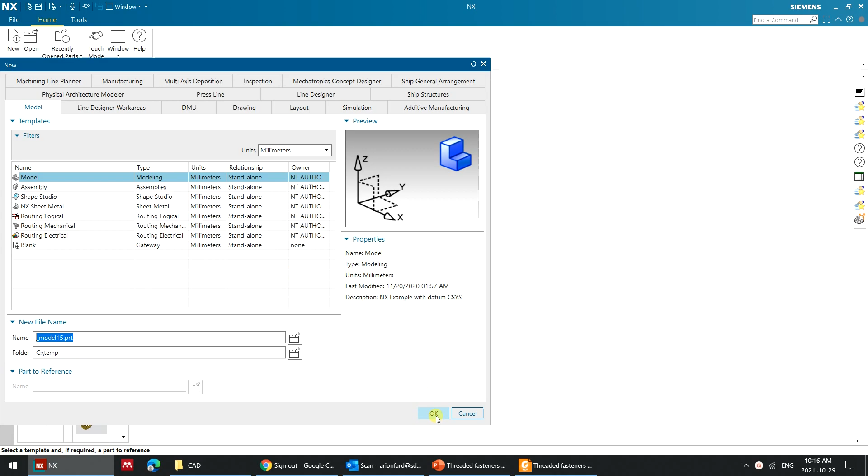So what I want to do is set up a very simple model that first we can verify the theoretical result for a static load and compare it with the simulation result. Again, we are following a static and linear case in simulation as well.

Then we want to see what is the actual easiest part for simulation, because there is a problem with simulating screws, and that's detail. If you want to simulate a screw in detail, like simulating threads, that requires a lot of computation power, so we need to know if it's actually necessary to do that.

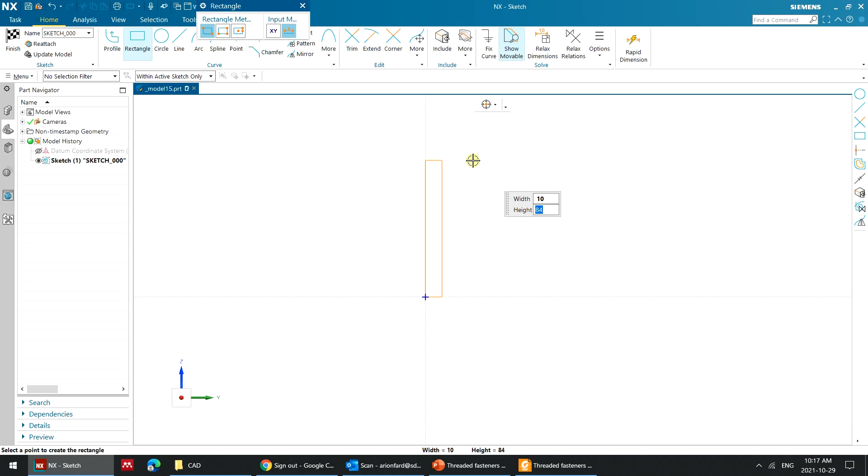Even without the threads, let's say you have an assembly with like 50, 100 screws, and the thing is that the screws are usually a much smaller size compared to the model, and that causes a huge difference in mesh size. So you're going to have a lot of fine meshes for the screws, and that makes your mesh very big and very time consuming to solve.

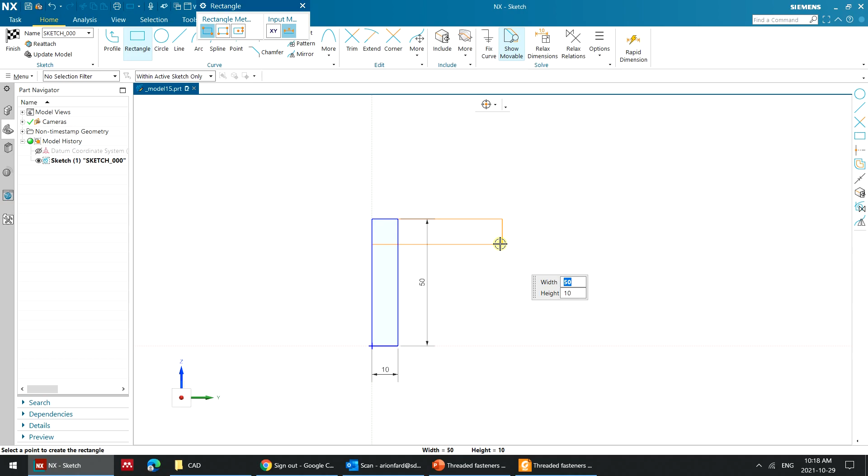So we want to see if there is a more simple way to actually do that.

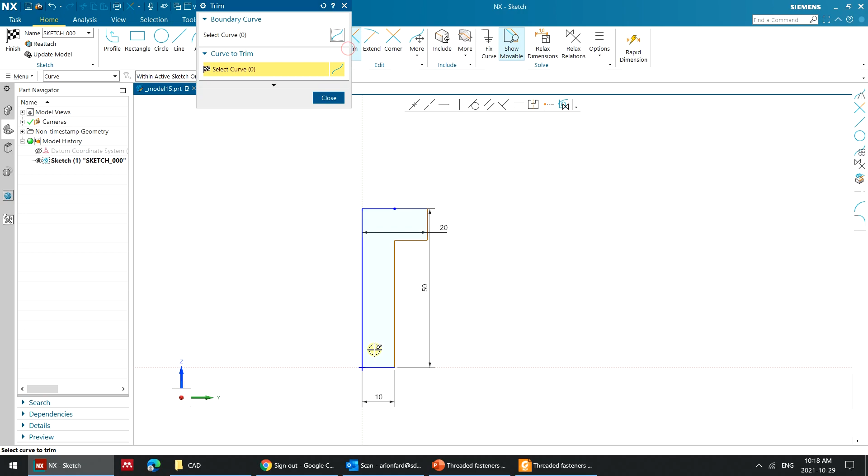Is it around the middle? Is it one? Let's go with a shorter one. I just need this for applying the load and nothing else. For now, I'm just trying to model the plates, then I model the— could you please trim here? Then I model the screw, which we're going to go with the simplest way, which is just a cylinder.

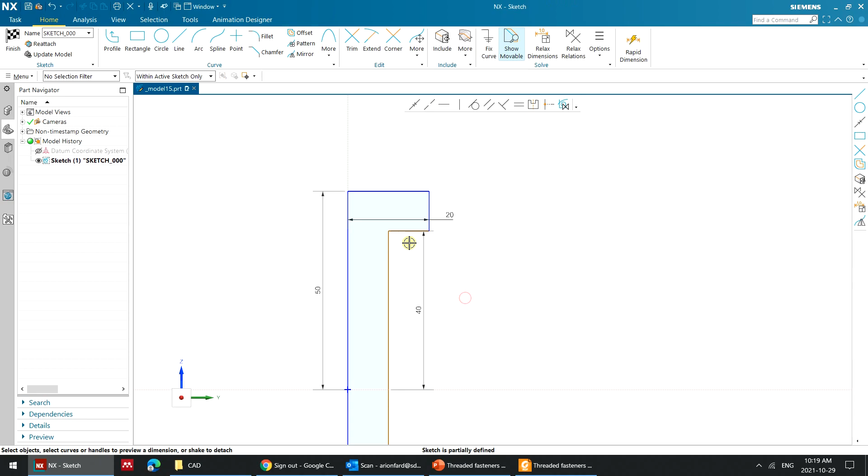I'm gonna... and I'm just gonna extrude this. It's a plate with two edges for applying the load.

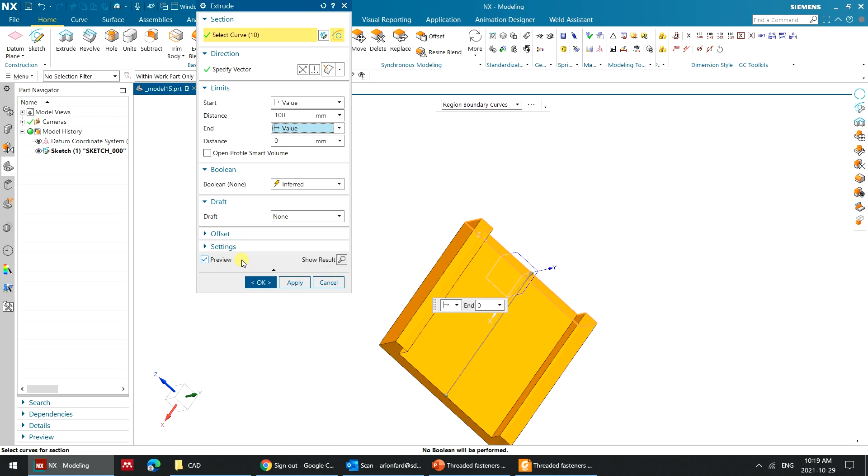Let's go with maybe 50 on this side as well, or maybe 100, just to have a bigger load distribution. Then I put a hole in the center and copy it, and then put a screw in the center.

Let's go with M10 in the center, so it's simple enough that we can confirm it with the theory.

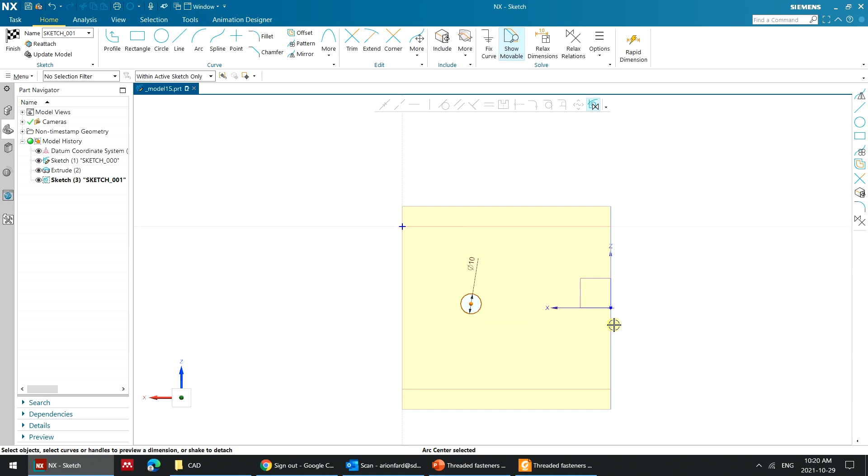But the speed you're modeling depends on the setting of your NX as well. I'm just trying to put it in the center. Yep.

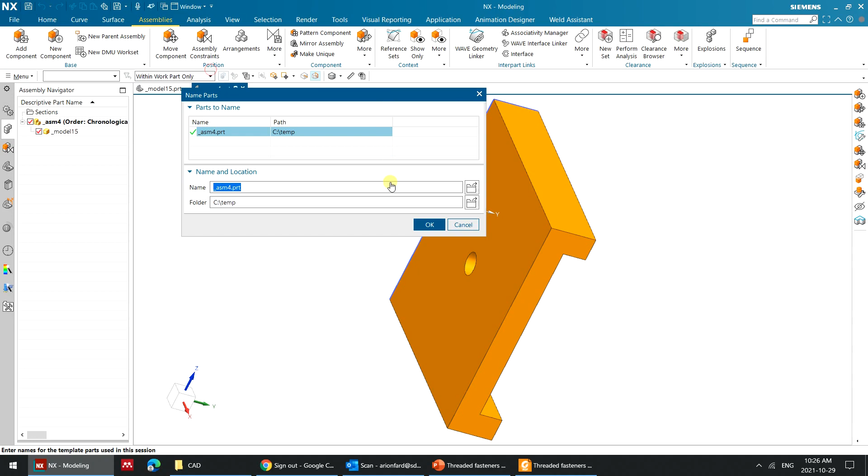So I'm gonna just copy this, but before that I need a new parent assembly to put this under. You just go to the assemblies and click on new parent assembly. It puts an assembly on top of it, and then you can save. It will ask for saving that assembly part. Then it looks like this on the assembly navigator on the left, right?

Now I can copy another part, but just Control C, Control V on the top, or just right click and copy, and then right click on the assembly and paste, right? Then I'm gonna unpack it because I want to move one of them. So at the end it's gonna look like this, right?

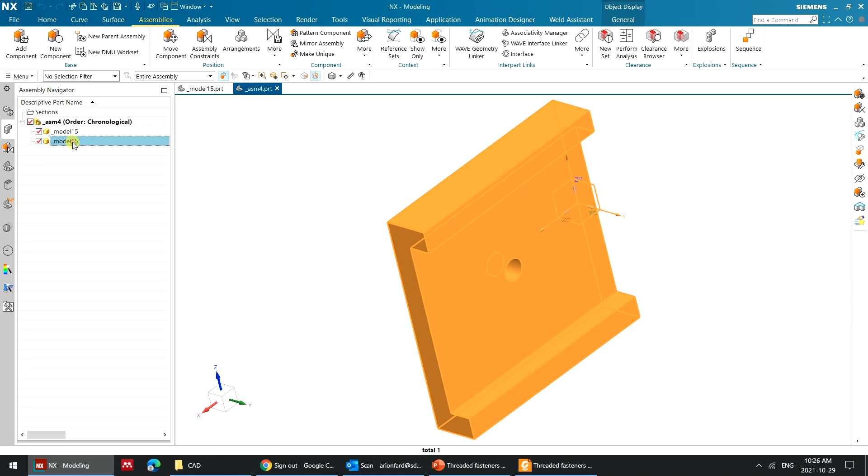And let's move the other one to the other side. So now I have two parts I want to connect with the bolt in the center, and I use a constraint to just put them in the right position for now.

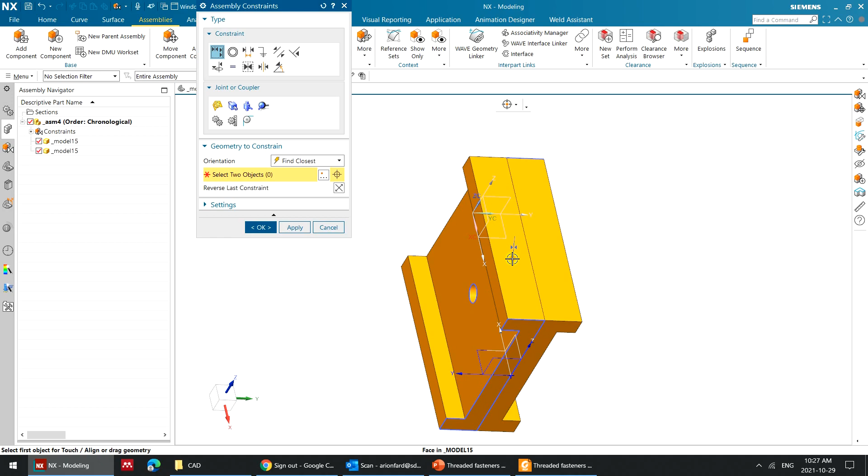Like this, making sure that the holes align, otherwise you're going to get some weird errors. The third part is going to be the screw.

So I'm going with new component, make a new component here, double click on it, and I will start modeling the screw. The hole is 10 millimeters, so I go with M10.

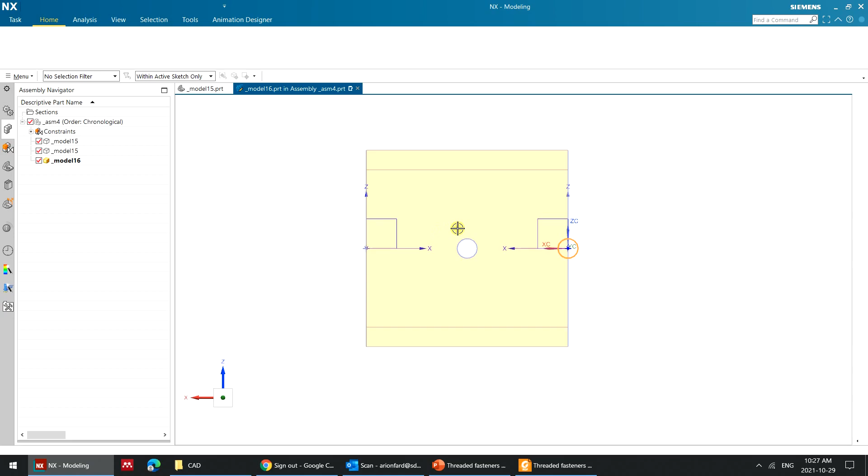Select any plane you want, and just a cylinder, 10 millimeter diameter. And the length I also go with 10.

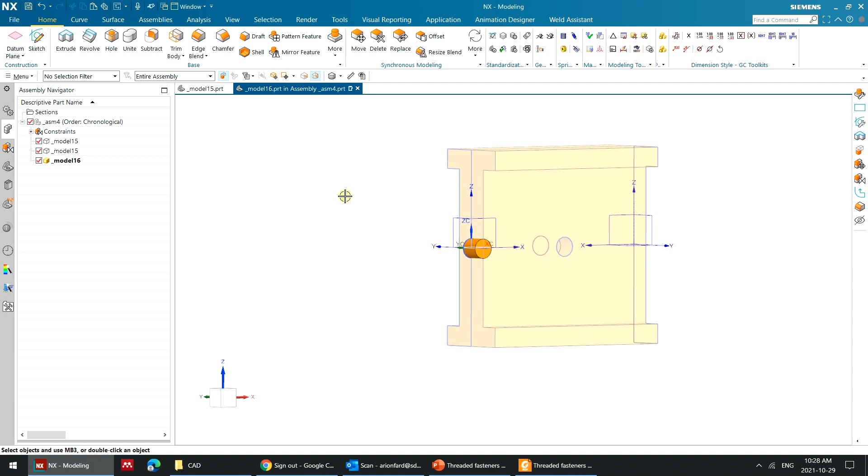Then I mirror because it looks the same. There should be a nut on the other side to hold it, but I'm just going to consider a bolt and nut as one uniform geometry because we don't want to simulate or model threads. They don't give us more information for the modeling.

We are looking for a static load, which is the stress in the center of the shank of the bolt. We are not looking into thread failure now.

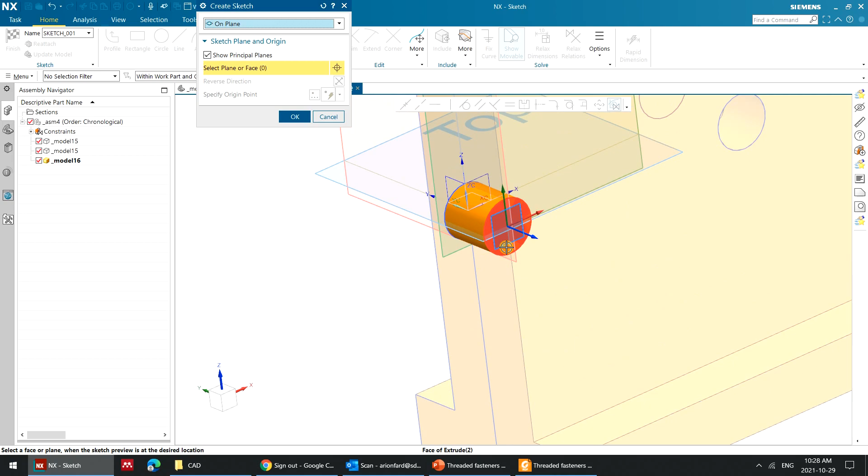So the screw head, I'm going with a hexagon, but we can do any kind of head. For 10, it's 17, but as a diameter. Metric. It could be something else with another system, and it's usually I think 7.

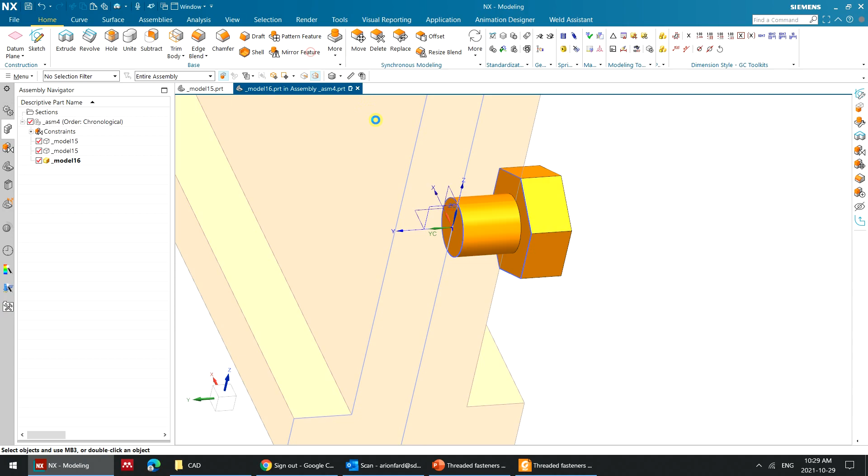So this is the head side, and for the nut side I can just mirror this. Where is the mirror feature? And I want all the features on this plane.

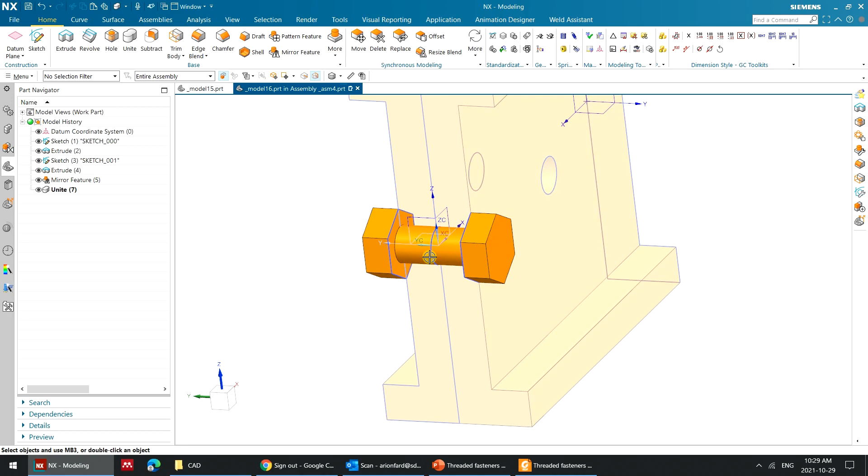Okay, let's see the result. Yeah, it looks fine. So this represents a bolt and nut that is going to hold these two plates together. You just need to make sure you unite them, otherwise I get two separate mesh bodies. I have to connect them together. Now it's just one body part.

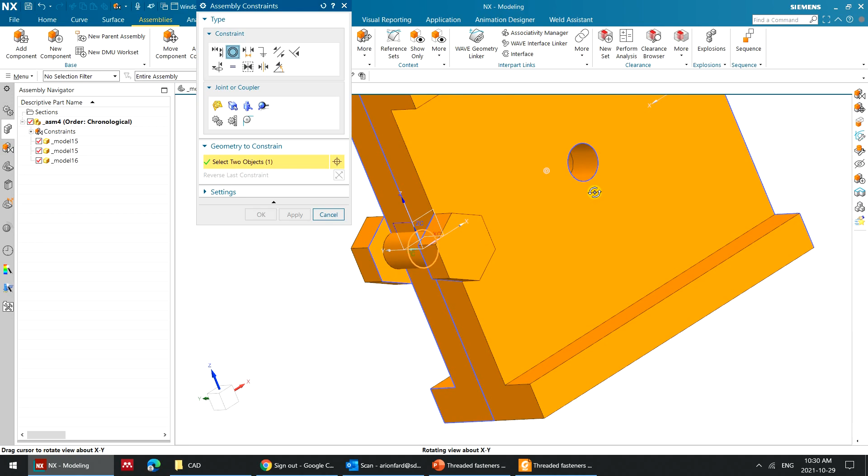I'm gonna save it, and then I'm gonna place it. I go back to assembly, top assembly. I can move this around. The best way is to use a constraint. Concentric constraint - this circle should go here. Which diameter did you use it in? 10. 10, yeah. So this is the model we're gonna simulate.

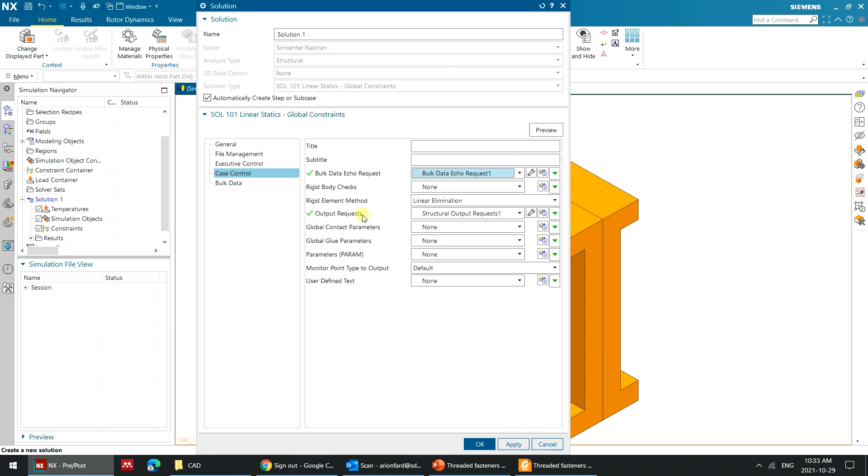So now the model is there, we can go application, pre-post. And I want to have all the parts. We're going with a structural, and as I said, this is going to be a linear simulation, a static load. So here, linear static 101. And create a solution. I probably need to come back here later and request some new outputs, but for now it's okay.

So the best way to run a linear static simulation is to always have some constraint. If you want to have some constraint and some load, how should I do that?

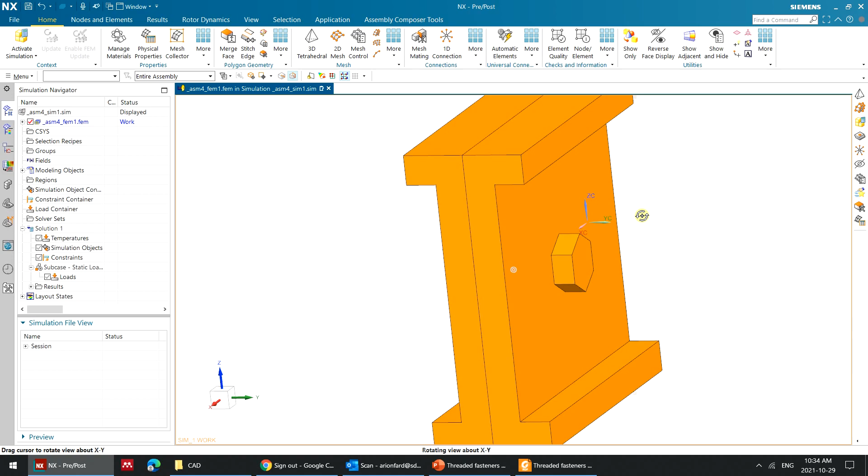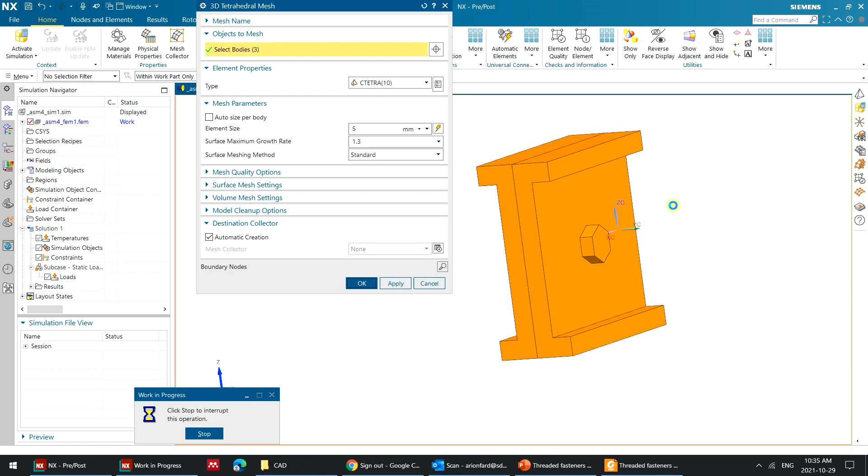So I have the mesh ready, and let's define the material here before I forget. So I want to, let's go with a steel.

Oh yeah, that's possible when you model your part in the modeling app. No, in the - no, I know. Listen, when you model in modeling app, you probably applied some material to it, or NX by default is using a default material in modeling. Okay, then you bring your model to pre-post. It gives you this option as well here.

If I go back to inherit the material here - here, you have this option of inherited. Okay, so inherited like the assigned - get it from the modeling. Oh yeah. But if you don't, then it says, okay, you already assigned the material, you want to override it. That's why it's asking.

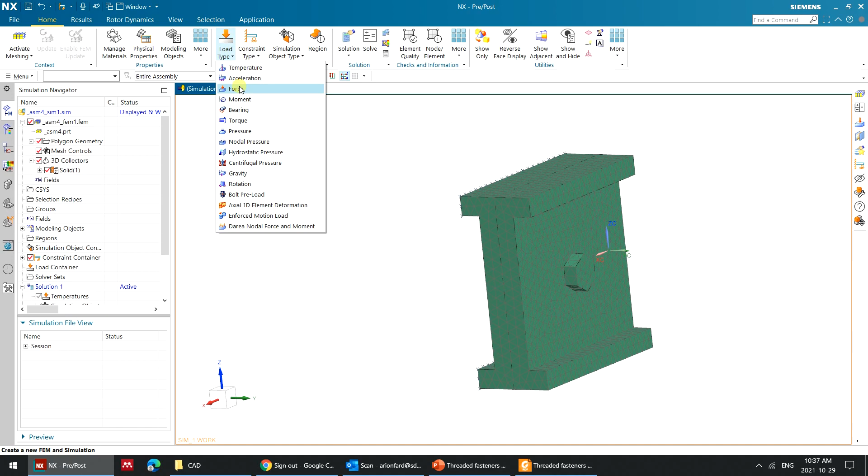Now if I fix this side, how much is the load on the other side? Anyone? 1,000. The 1,000 work on both or 1,000 on each? Let's go back, good question.

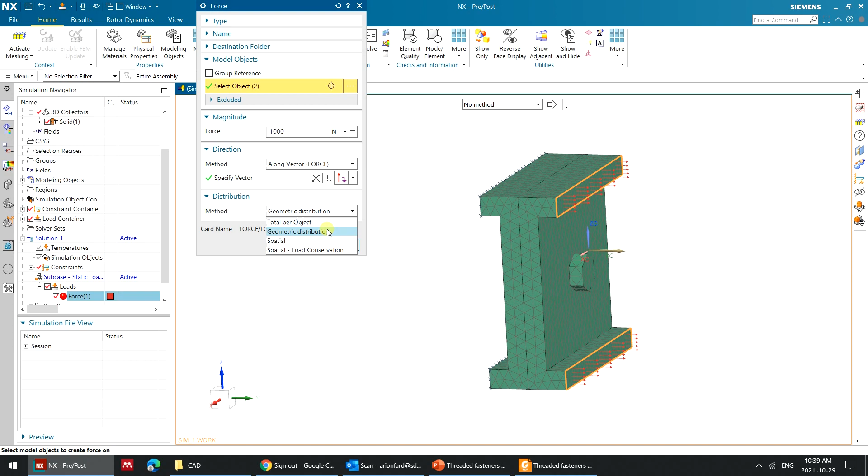When you define the load here, it gives you options. Did you want it total per object? Then it will put 2,000 because I'm selecting two objects. Or geometric distribution means that whatever you selected, I'm going to distribute 1,000 all over it. This is what I want. If I use total per object, it puts 1,000 in the top and 1,000 in the bottom. So go with the geometric distribution.

And contact. So for the contact, I'll go to simulation object type. I really don't need the contact. I need gluing. What is the difference?

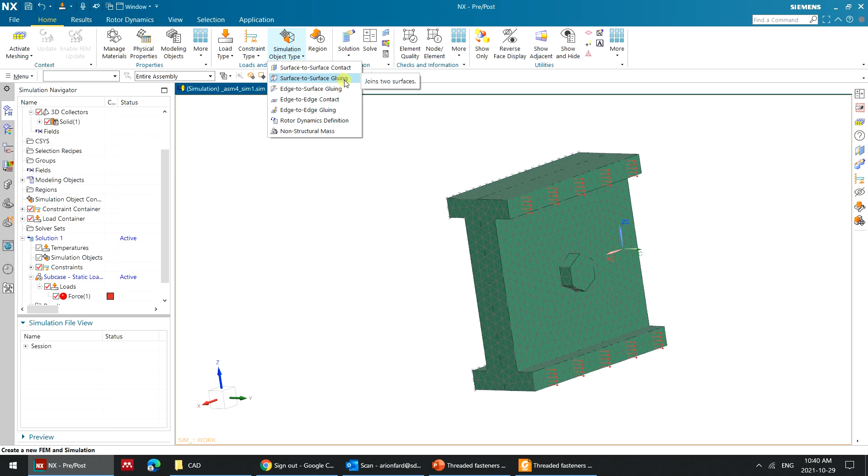For the contact, you define friction. So it is allowed to move, right? Generally, when you fasten a bolt, it's not going to glue there together, but also you don't expect it to move around. So the gluing will do the job without going to the contact loop. It's more simple to use glue. Glue means exactly like contact, but without movement. So it basically, as the name says, it glues it together.

I only want to, if you select all of it, let's see what happens. If you let the software auto-detect all the contact, it comes back with 5 pairs. And I can see the pairs if I just go here.

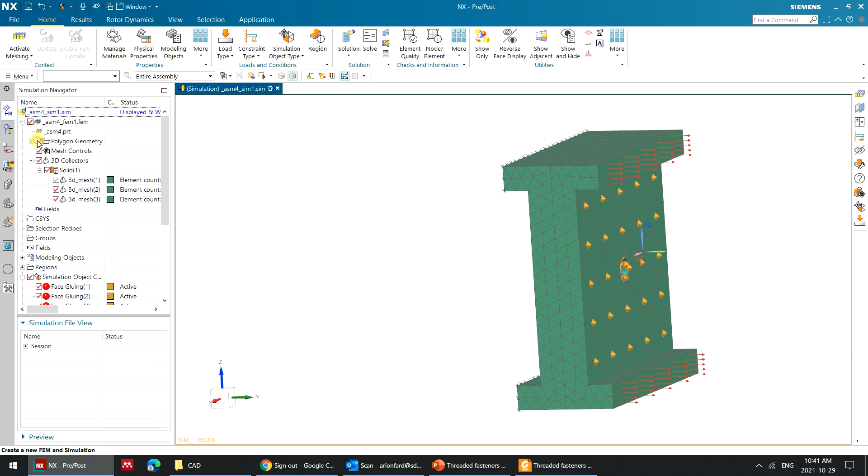So this is 1 pair. It detects the shank contact inside the hole as well, but I don't want that, I don't want to connect it like that. I think it's easier to hide one part and see the contact from inside. So I don't want this contact. Which one is it? From the shank, this one, I can just delete it. And also that one. I think all of the contacts are wrong, and this is the contact between two faces, so we have to define the faces manually.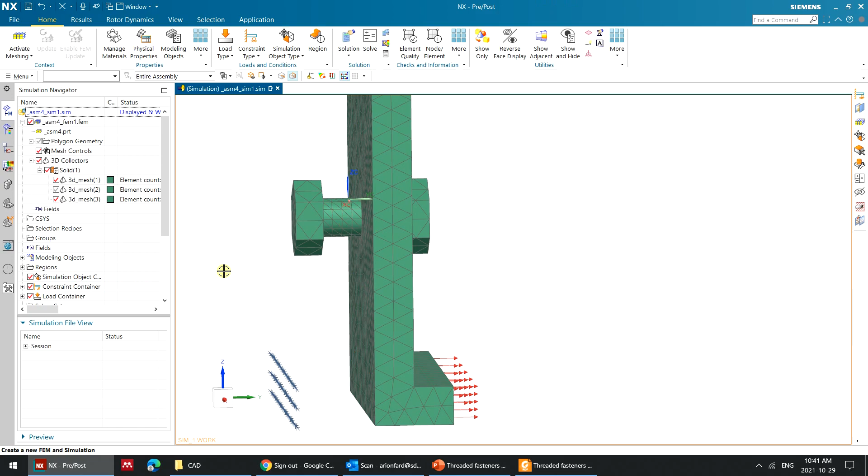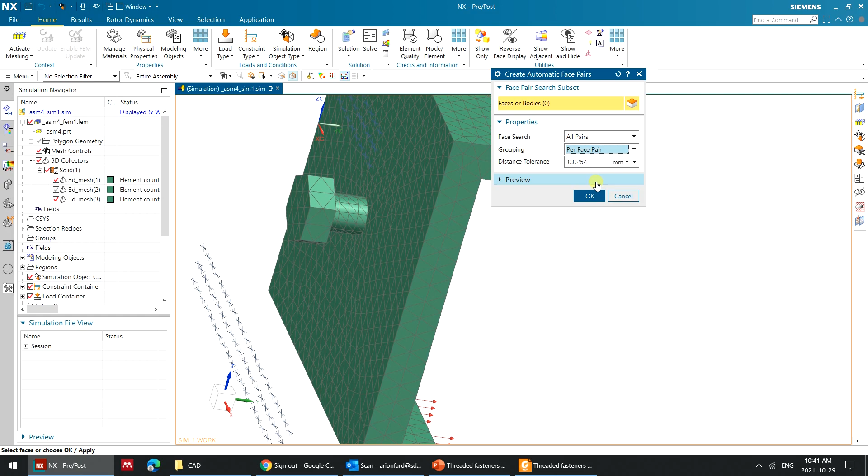So let's select manually. I go back to contact gluing again, selecting pairs. Make sure here you select per face pair, so it's not automatically looping around the body looking for all the faces that are in contact. I want to actually dictate the faces that I want to glue together. Let's hide this, I want to glue this one. I have to bring back the polygons.

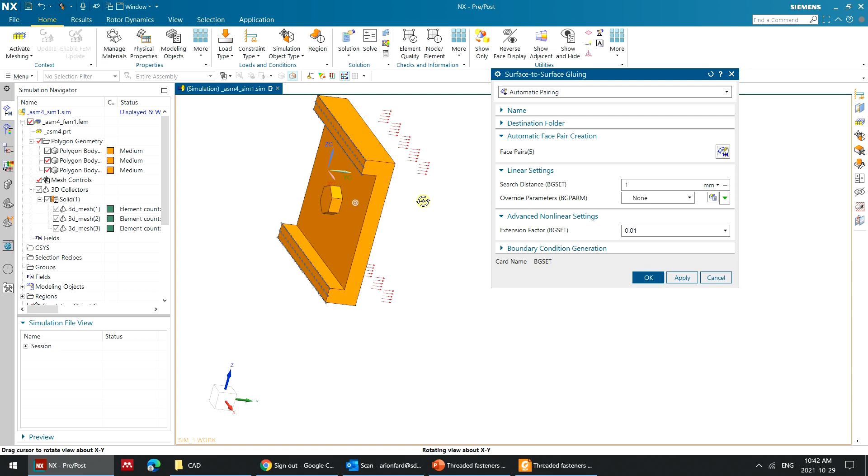Yeah, this face is going to connect to this face, and the other one is this one being connected to, yeah, this face. And this should be okay. No, I have to do it separately, or I have more. Yeah, I can just remove the ones that I don't need. This one is correct, this is not, just delete it, this should be deleted. This one is correct, and this should be deleted.

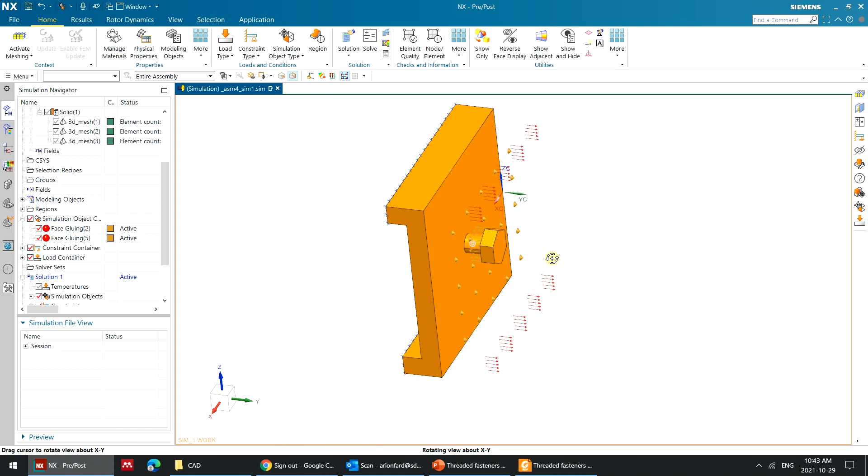Okay, so it should look like this at the end. So washer face contact to the plate on both sides. Let me bring back the, yeah. Okay, let me save here. So I got the contact gluing.

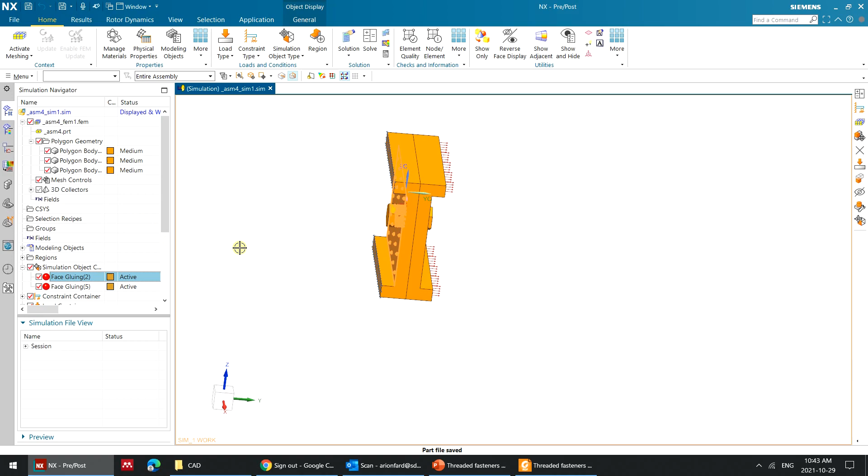Why do you want to do the... it is not actually in contact. It is if you have threads, but as I said here, we don't want to focus on thread engagement or thread failure, that's the next lecture we're going to do. We just want to rely, and that's not always the case. Usually you can have a full shank without thread, so the thread just stands out on the nut side here. That part is threaded, the rest is a shank.

We're doing gluing because we want to see where it fractures or what? Yeah, we want to measure stress inside the bolt. If I run the simulation without contact, what happens is that this part just goes through these, so it doesn't work. I can define a contact, not glue, but a contact, but contact loop is complicated, it considers friction as well. I don't want to consider that, I just want it to be completely like welded. It gives a faster simulation if you use gluing instead of actual contact, if you are sure there is no relative motion.

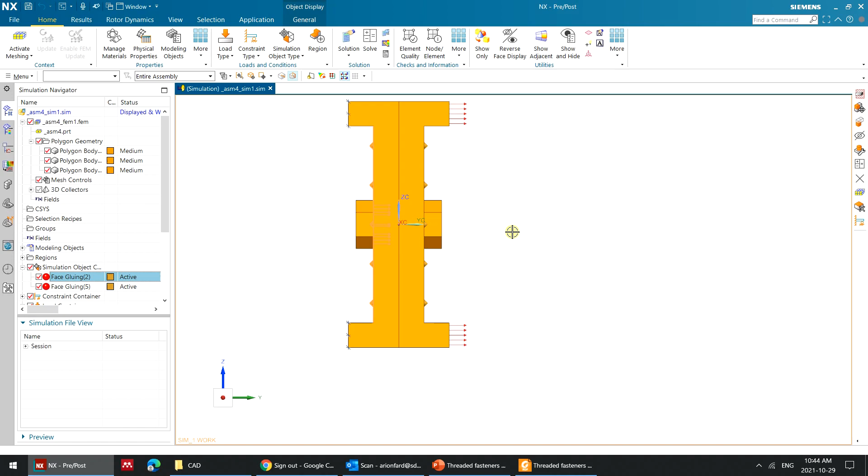What is the benefit of doing this in comparison to an analytical calculation? You're gonna see here, you're gonna get the same result. But if you're looking for a stress concentration, this type of simulation in general has no benefit. This is the wrong way of running a simulation on a bolt, as I said, because I'm wasting a lot of computation power to mesh very small bolts, which I'll only care about the axial stress.

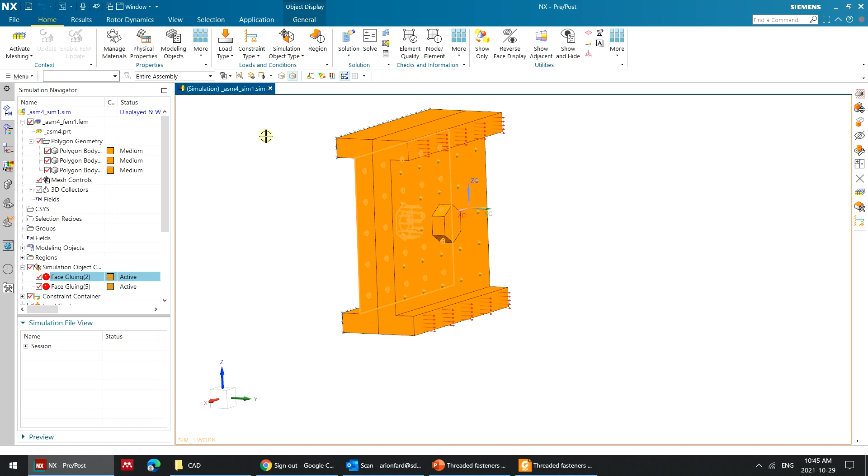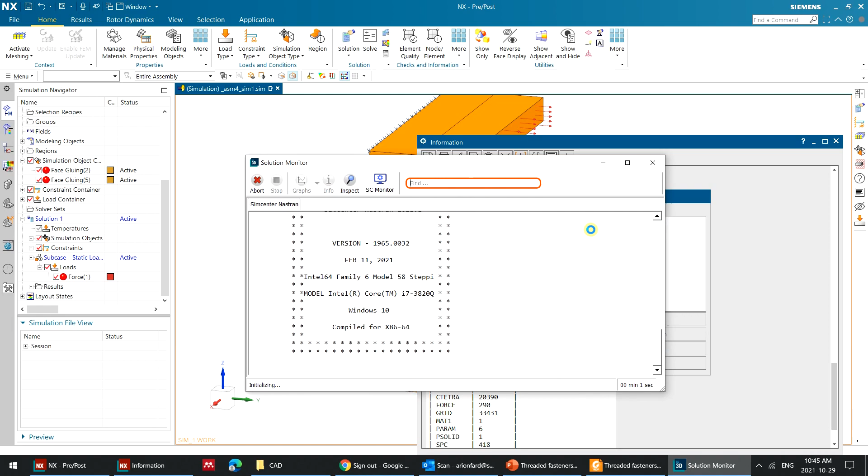Why are you not just using symmetry in this problem? Yeah, you can, actually you should. I'm trying to keep everything else simple, it's easier because my focus is on simulating bolts, so there's absolutely no need to even have the plates. Unless you actually want to read the stress on the parts as well, so you solve everything at the same time, right?

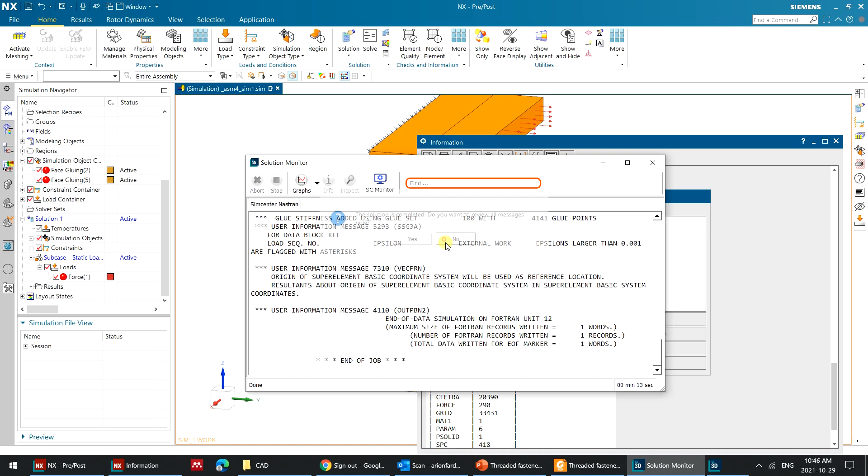But don't you also have bolts that are already preloaded? Yeah, that's another thing that is not possible with this kind of simulation, but I'm going to show you the right way of doing it, which allows you to add preload as well. But that's a bolt inside of NX, right? That's in NX, you're gonna, if you wait like 5 minutes, I'm gonna do it.

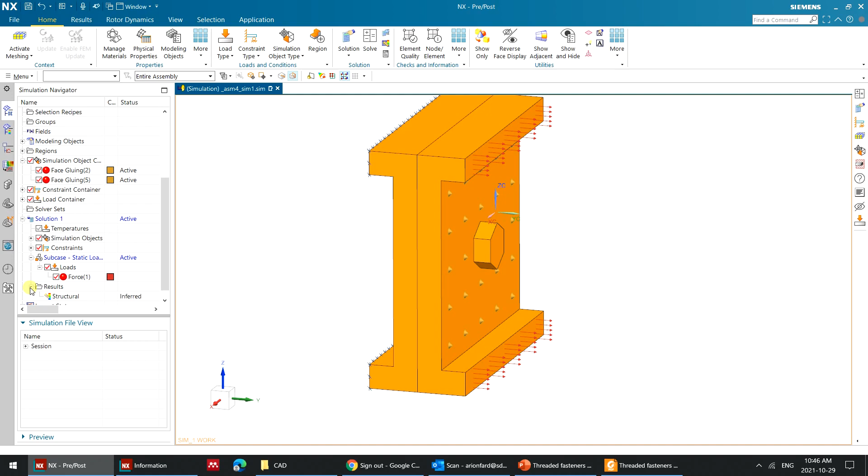I haven't checked it. Okay. If you have, I will be very impressed.

What is the difference between elemental and elemental nodal? It averages on the node and element.

No results. What? Sorry, calm down, it's NX. Yeah bro, it's just, it always gives you errors.

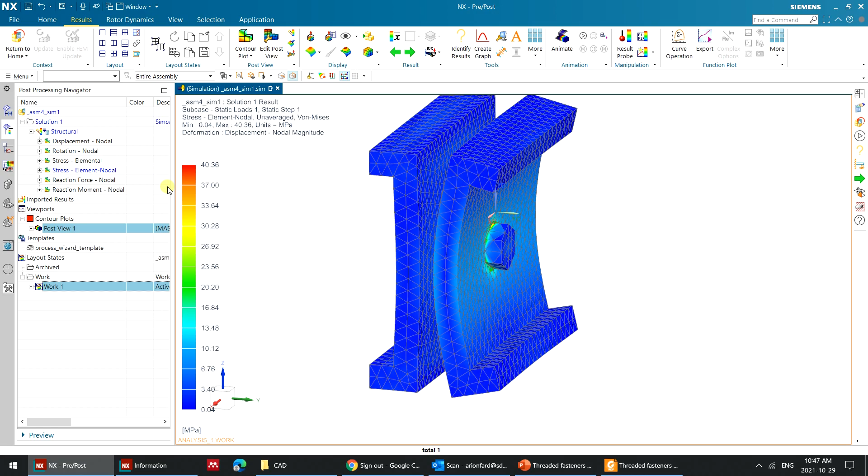Of course it fails. Elemental averages over elements only, while element nodal considers the node, and also gives you the option to select the node when you go to identify result. You see, I can actually select the element, but I can also select the nodes as well to read the stress.

So I have the simulation, it looks like this, and to just focus on the bolt, you can go here to post view and hide the meshes that you don't want.

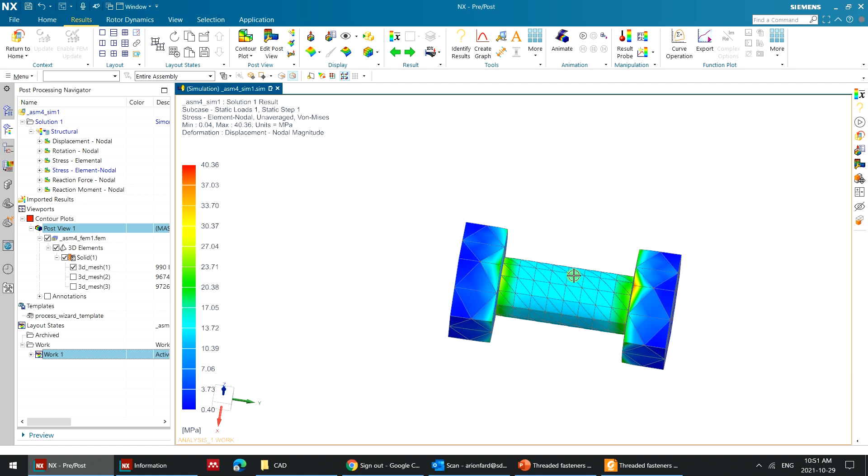So you see the stress on the maximum, if I want to check it, is around 40, which we already know is because of stress concentration and singularities on sharp corners. What I care about and what I want to compare with the theory is the average stress in the shank. And I can just go with identify result.

I want to pick a box selection of all the elements, maybe around here, and average that. That's the same result, of course.

Simulation sigma is 12.72. What was it? Forget about it, 12.73. I had the same problem.

Okay, there was a problem... We failed with the 72. This is good enough, which shows if your case is a static case, in theory it actually matches very good with simulation.

If you are looking for a static linear case and the stress distribution is good enough that you don't have a stress concentration, you can easily compare it to the theory.

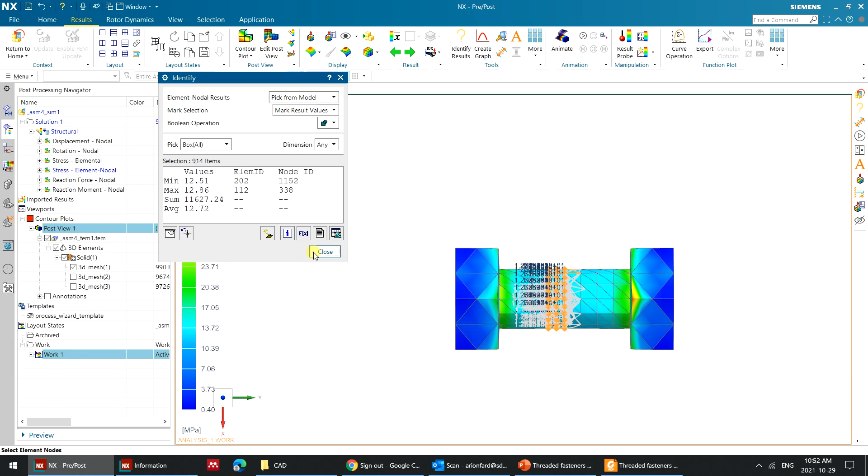But there's a lot of elements just for this one screw. And imagine there is a sealing problem, you have 50 screws all over the part, and then you mesh it, solve it. You're gonna have a headache averaging them and finding the cross-sectional stress and all that.

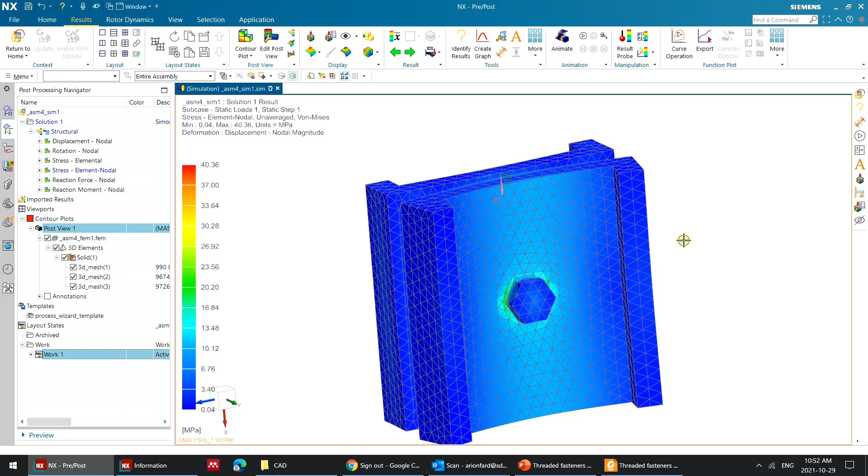So NX actually has a bolt simulation thing, and you thought NX sucks, but not that much. There are useful things you can do with NX.

If you go here, under Connections, you'll see we tried mesh mating, we tried 1D connection. Now you get a bolt connection, which is just a 1D connection with extra steps. So it will do a nice 1D connection, representing a bolt with a 1D connection, the way I'm going to show it.

But before that, I have to get rid of that actual bolt there and replace it with a simplified version that NX is offering. To do that, I probably need to redefine this.

Let me see, how can I edit the FEM file? Let's go here, edit bodies to use from all visible. I want to go to select, and here I...

Why do we have to take like a million things just to do like... no, maybe I'm doing it. I mean, there are thousands of ways to remove that screw.

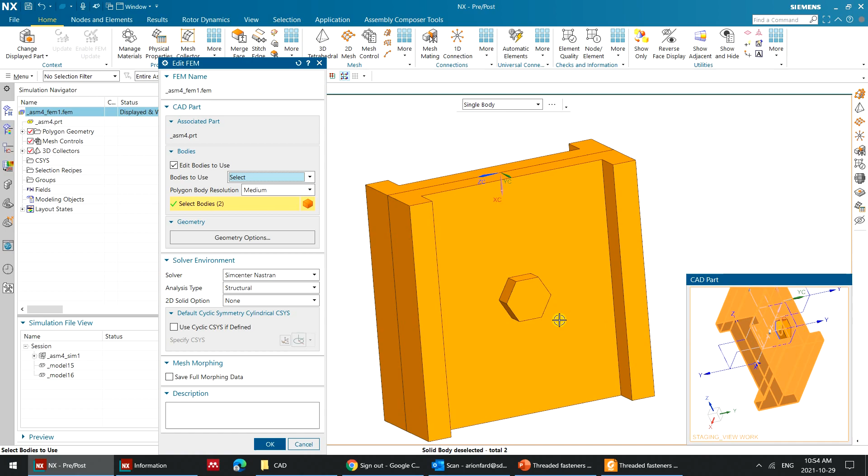You could just remove the polygon and update it. This is all I used to do, so I don't... The same with modeling, I did a quarter of the model, mirrored it, but you could do it a different way, maybe more simple. I don't know, it's just a habit that you just need to get rid of.

You could also remove the mesh as well, but it stays there in your monitor, then you have to hide it.

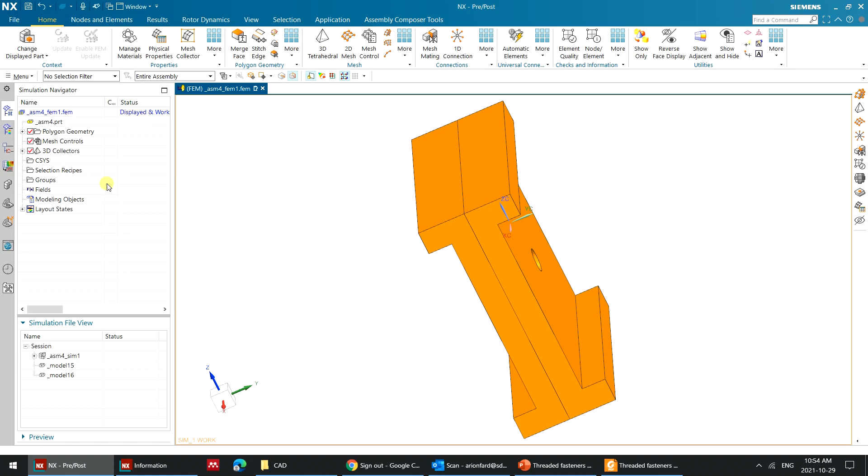But yeah, let's continue. So I have it now. I can go back, double click here, go back to the simulation, and you see the face gluing.

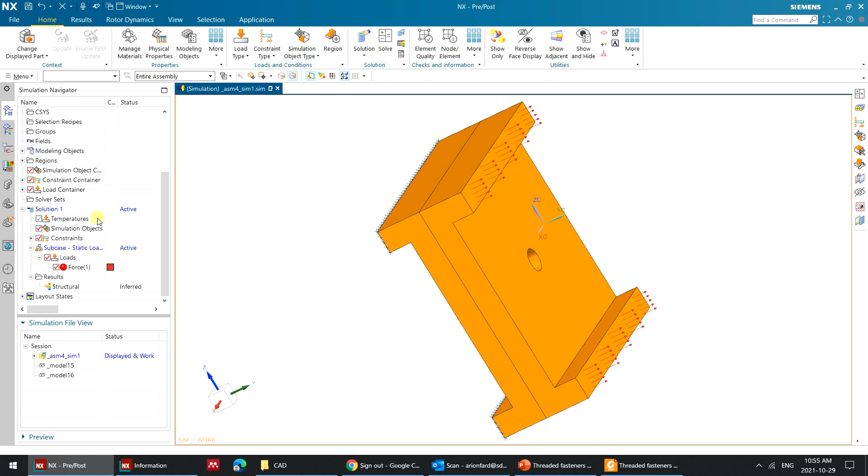It's not wrong because I actually don't need it. There is no washer face, there is no screw. Let's get rid of that. Force is okay, and constraint is okay.

Now let's try this. I have to go to meshing, so I activate meshing. More, where is it? Here, bolt connection.

So on the top, you have different options. You can do a bolt with a nut.

Let's see it first, then I show you. I'll put a bolt in a tapped hole as well to see how it looks. We're not going to use a spider at the junction - that's for something else, you can simulate a rivet with that. Let's stay with bolts with a nut. That's what we have here.

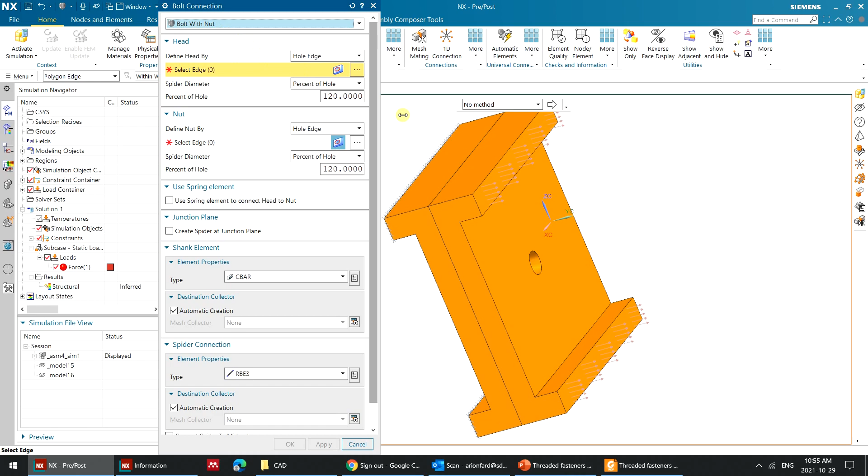The first one is the head, the second one is nut. The head is asking for a hole edge, so let's assume this is the hole edge. After I apply, you'll see what happens. Then I'll explain this percent of hole.

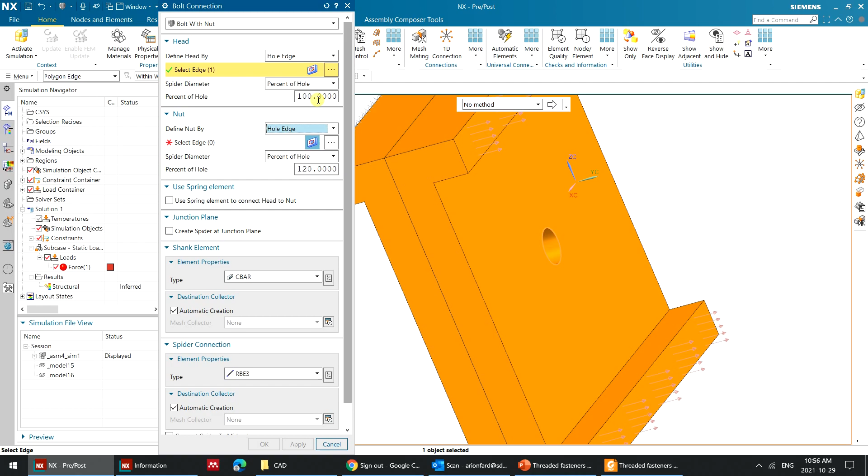Let's go with 100% now, so everything is the way I select. The second one is nut, and is this side - again, let's stay with 100. Then I'm gonna change it back, but let's see how it looks like first with 100.

What is that? How many? Why do you have so many? Why do you need to show that? Okay, decimal points - maybe I have to change the defaults.

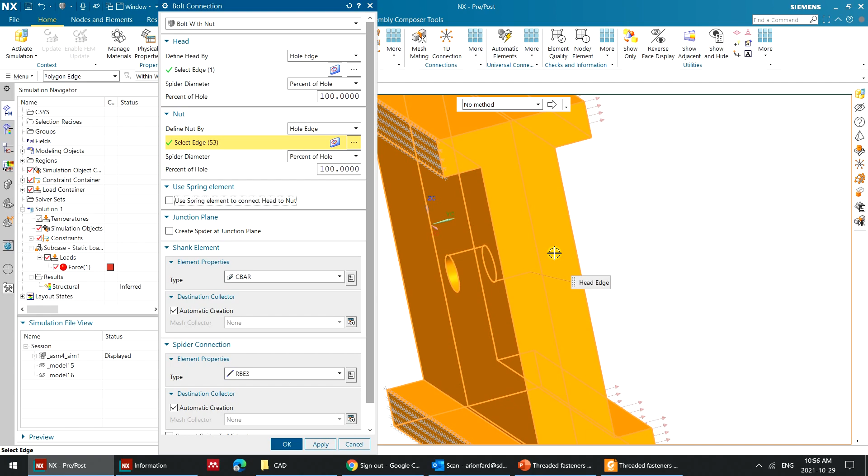I think it was a double variable, but the programmer didn't want to. Anyway, so here the way it works is that NX is just putting a 1D connection, which is a line.

Instead of the shank of the bolt, it's just a line, but it has cross-section properties implemented with a CBAR in NX, or CROD. If you're sure it's circular, you can go with CROD, which I will use in this one. But technically, you can have any cross-section for the bolt. So I can select a C-beam, which gives a cross-section of a beam, a square shape.

You can assign any cross-section to 1D connections without actually meshing it. So it's going to behave like a beam, for example, if I select that, but I don't need to mesh a beam - that saves a lot of computation time. So let's go with a CROD, and that's the element properties.

And I want it to be RBE3, and the next thing is the actual head. How does it represent the head? Let me click apply just to - why do I have a different... oh sorry, here I selected the wrong side for the nut.

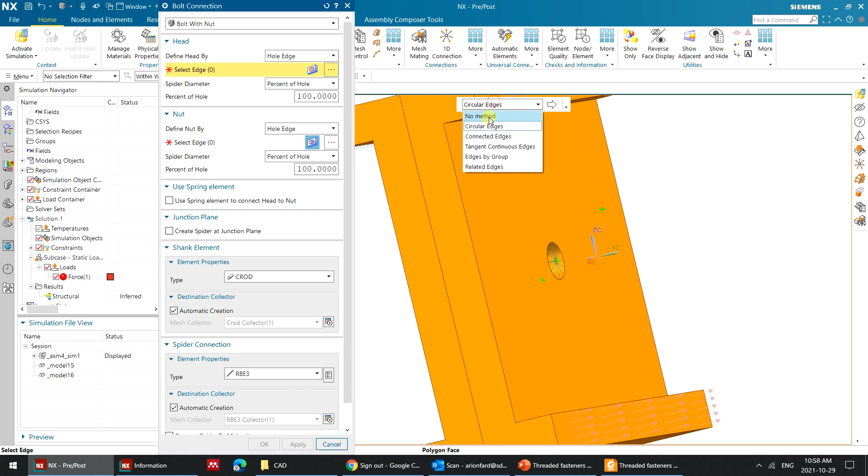Let's go with the circular edge here. Come on. On this side, I think we missed one - yeah, there should be one. It was 53, I don't know why.

Okay, now it's correct. Now you see how it actually represents a bolt. I will come back here and edit it again, but I think I made two - I have to get rid of the wrong one. Let's remove it. Yeah, okay, now we are good.

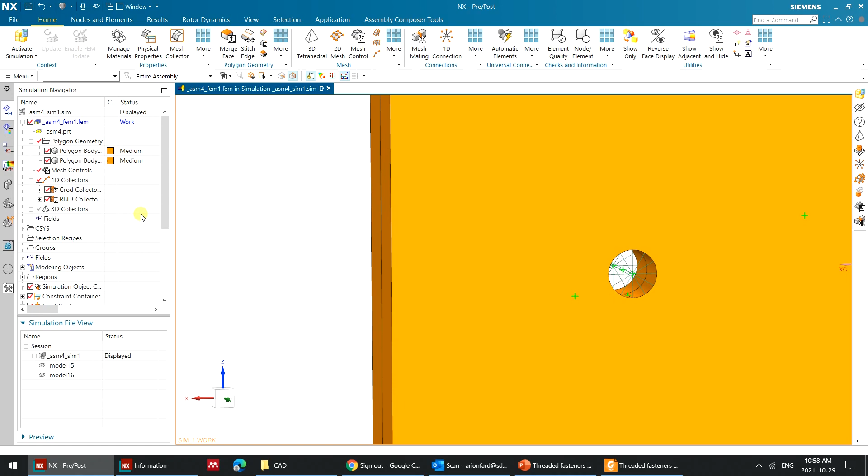So a bolt is now represented like this: there is a spider element representing the head, and there is a 1D element representing the shaft. The axial element, the spider element, is a rigid body element, so this one is rigidly connected, but with RBE3, which is a more flexible rigid element, so it won't make this hole rigid. Otherwise, you won't see any deformation on the side, which we don't care about - we only care about the axial load on the shank of the bolt for now.

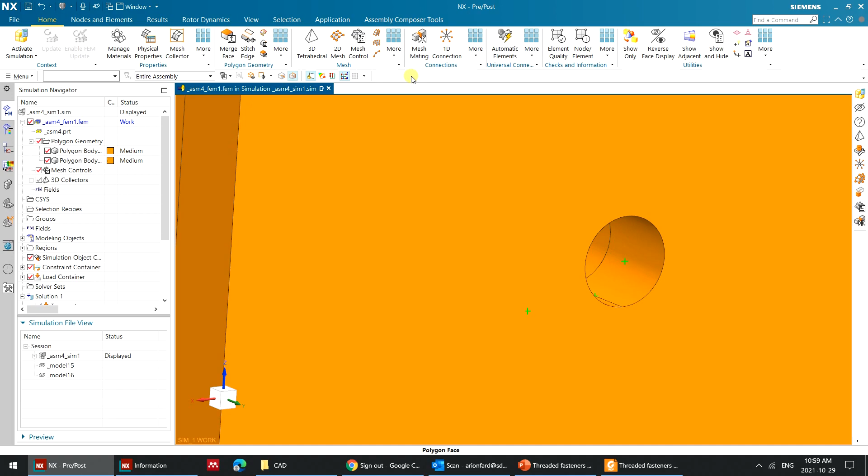But let's go back and let me remove this and make it again. Or maybe it's easier to just remove it and do a new one to see the different ways of doing it.

So let's select again - this is the head. Come on, this is the nut. Now let's say in reality you have a washer face - a bolt is not going to sit right on this edge, right? It's going to sit on an area a little bit bigger than the hole, which is the washer head. You can specify that as a diameter here if you have it. I think for M10 it's around 15.

Or you can write a percentage, like if I write 120 the way I had on both sides - you better go with a diameter, but I don't have it for M10. And if I click OK, now I think I need to, yeah.

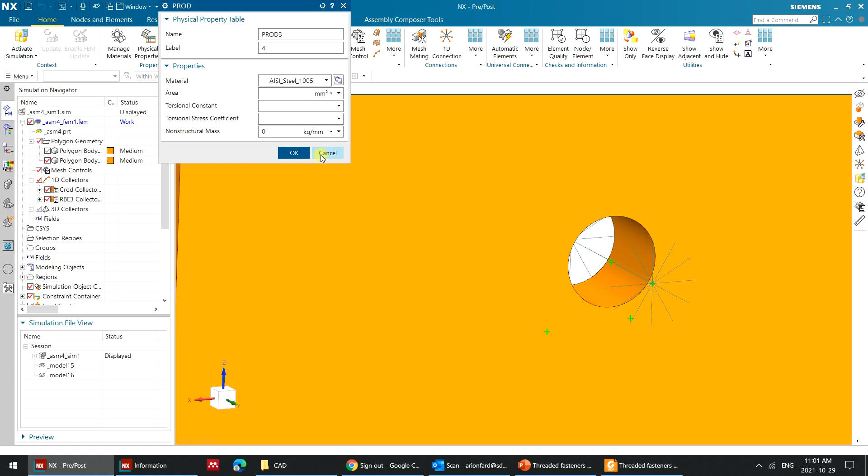When you change 100 to what in this percent of hole? 120. How can you delete it? Because it can't be deleted. Yeah, I can't delete it either, but I just... okay, put it in a new one. Let me do it again. You just click on both, right click, you have delete. Yeah, you don't have that. Yeah, right click on 1D. Okay, you don't have that option.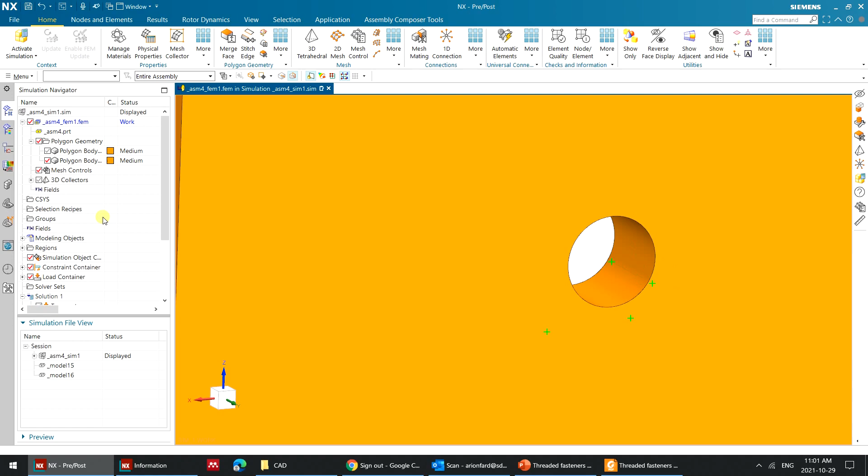It's insane, I have changed this plate part. I will do it again. The bolt connection, you wanted what? You select both of the edges. Select this edge. Yeah.

I have to. I did it wrong. Actually, let me deselect.

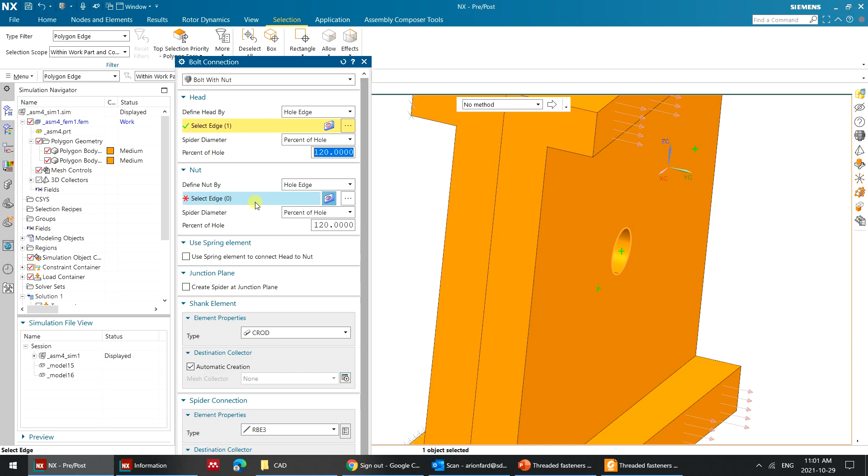So this is the plate, this is the head edge, and then you go for the nut and select this one.

You can go with a rod if you have the area of the nut or area of the shank, or you can go with a bar if you want to actually define it. I don't have the area, so I go with the bar.

Let's see if it's easier. It gives me more options to define. And the rest of them, as I said, the spider element is the washer head. You want C bar, right? Yeah, we can change that later if we want.

And what else here? For now there is nothing else I want to change. So it should look like this.

And then I go under 1D connection, double click on the bar. Now I want to define specifications for that central or axial element. Click here, you can select material here, which is steel. Then you need to define the section.

And click here, add a new section. Now you have options. I'll go back. Okay, let me go back. Are you here? No, where are you? Okay, let's go back, like double click on the bar collector.

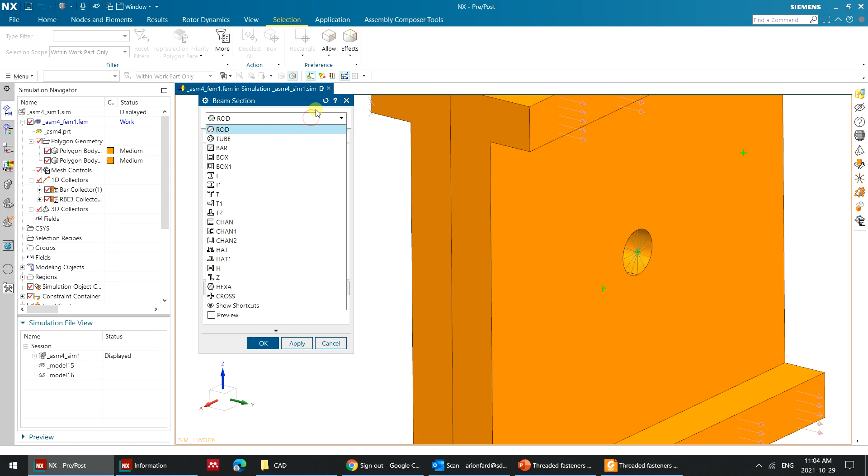Are we good? Then create section. Okay, the cross section of a screw is a rod, but you could define it as bar, box, whatever. I go with a rod, and it is asking for radius, which is 5.

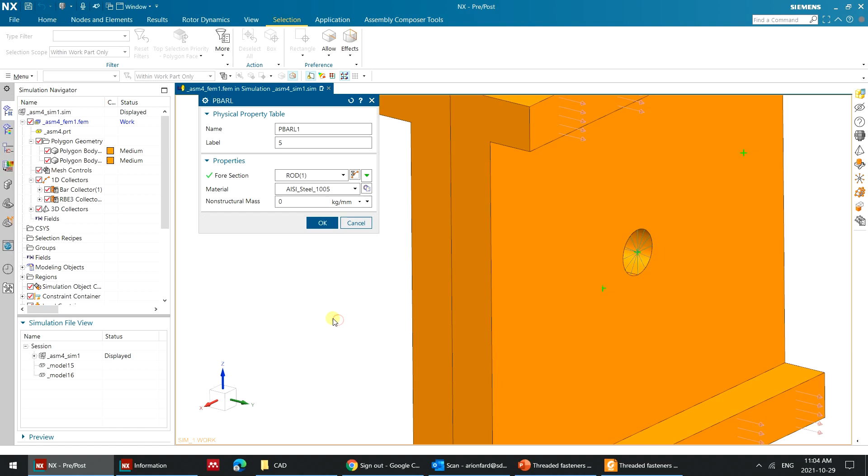No, sorry. Yeah. And click OK, close, and OK, and OK. Just click OK everywhere and close it.

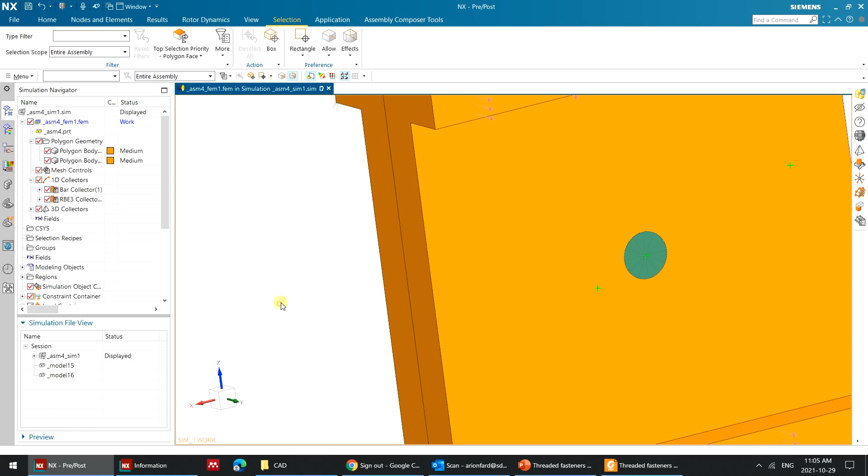Now it's still not very good visible if we did it correctly, so you can actually right click on the bar collector, go to edit display, and it gives you this option of display section. You can select if you want NX to actually apply the cross section all over that element, and if you do this you actually see it as a solid like this.

Just tell me where you're stuck. Maybe I can.

Right click, edit display, display section, change it to solid. What? On the collector. What? Okay.

And then I can see if the screw is actually or the bolt is actually correct. This is just extruding only on the display, only on the view. In reality, it's just a 1D section with the properties of a shank or circular cross section. But NX can show you how it behaves actually.

So I don't need to mesh it anymore because I'm representing the shank of the screw just by a 1D element with this kind of cross section. And let's go back and run the simulation and see if it works.

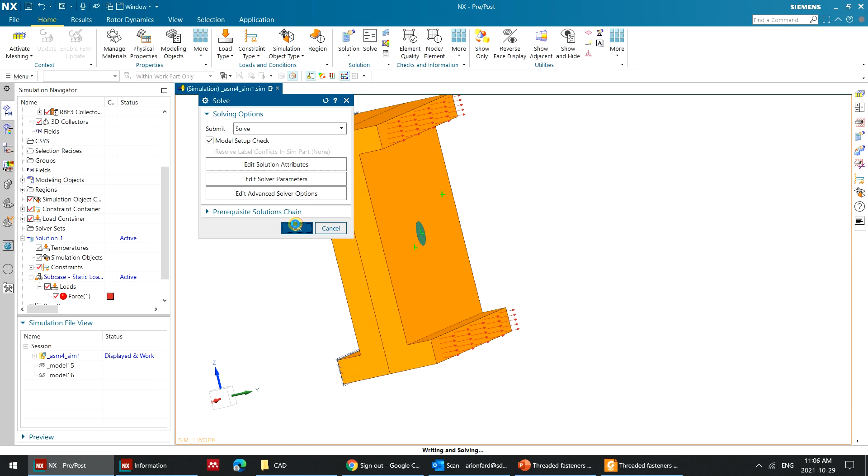I activate simulation. Let me check it again before I move the constraints. Okay, should be fine. Or we get an error and it's a new thing to learn about NX.

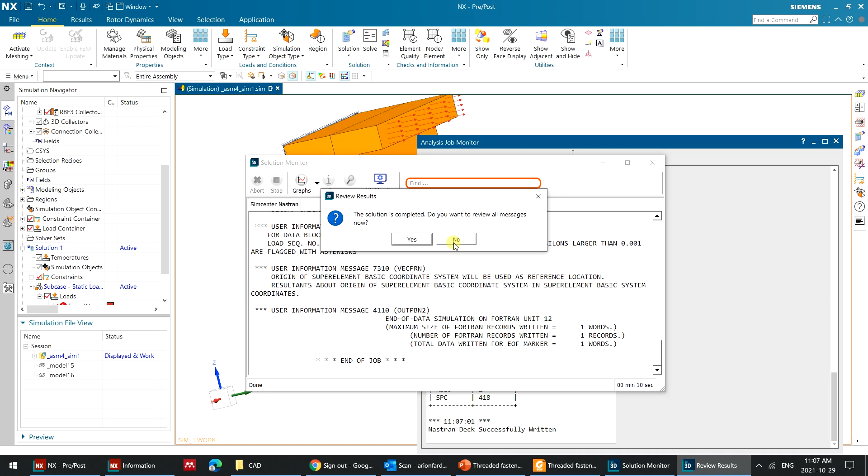For this one, it probably takes same amount of time. We only have one screw, and meshing it or representing it with 1D element doesn't change the time consumption that much. But if you have 50 or 100 screws, it changes a lot if you represent it by 1D elements or by hundreds of elements.

Okay, let's go to the result.

Yours is probably different, so let's go back to simulation. Right click on the solution. We have to ask for information on bolts, because we did a bolt connection without asking for the report, and NX doesn't know. So click on edit, go to the case control, output request.

Click on the wrench. On the bolt result, you have to enable or request bolt result. What was the preload option that says I do? I'm going to apply preload later because we don't have it in theory yet, and I don't want to mix it with this, I want to compare it to this one. It gives me an error because it says we need a preload to be applied.

When you click... something's load, okay, you should probably remove the load applied on your system somewhere. Yeah, do it again, constraints. I don't know why it's removed. But okay, here you need to request the bolt result, so it appears on the result when you run the simulation.

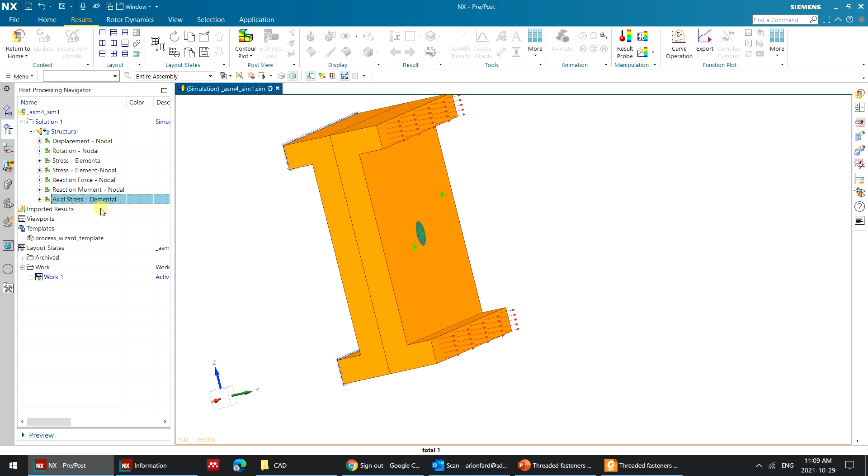If you do, and you run the simulation, go back to the structural, you have one extra result here, which is axial stress elemental. If you double click on it, it only brings out the axial on the 1D elements. I don't even need to probe it. On the left you see it's 1273, which is similar to what we did with meshing, but with only one element, which is super fast compared to meshing the whole thing. At the same time you can see the stress on your part as well.

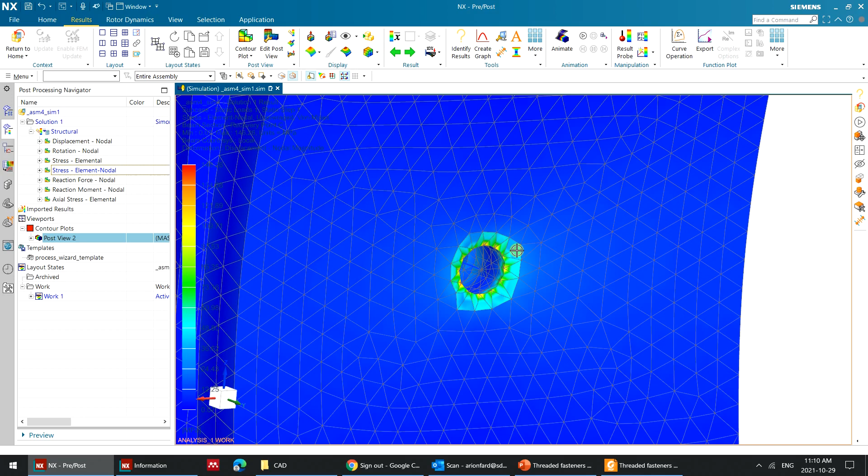So if you click on element nodal, you see the stress on the part, and the washer face is also represented here because we specified 120%, so it extends that spider element 20% more to represent the washer face. So you actually have a perfectly good result comparing to the theory, but without meshing the whole screw or the whole details of it.

How did you? There was another type. There are more types, but another important one is having a screw on one part but threaded into the other plate. How do you represent that? That one is also very simple.

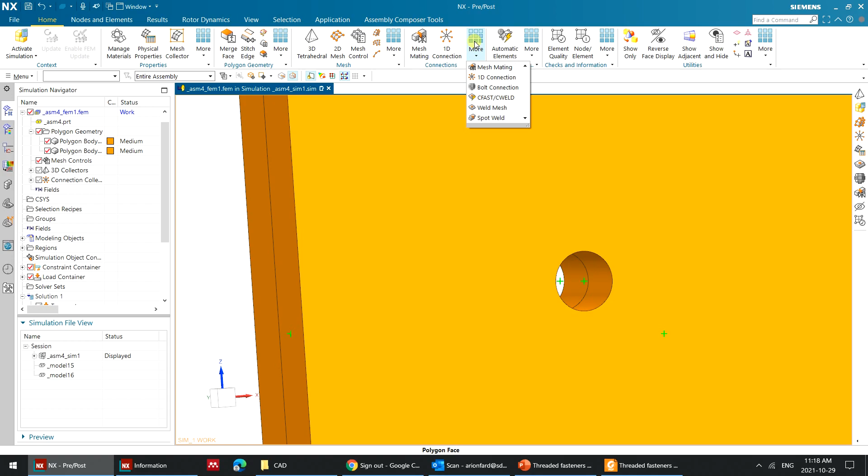Let me remove that, I'll go back to meshing. I remove it because it's easier to see, otherwise it overlaps. So I go to the bolt connection and switch to bolt in tapped hole.

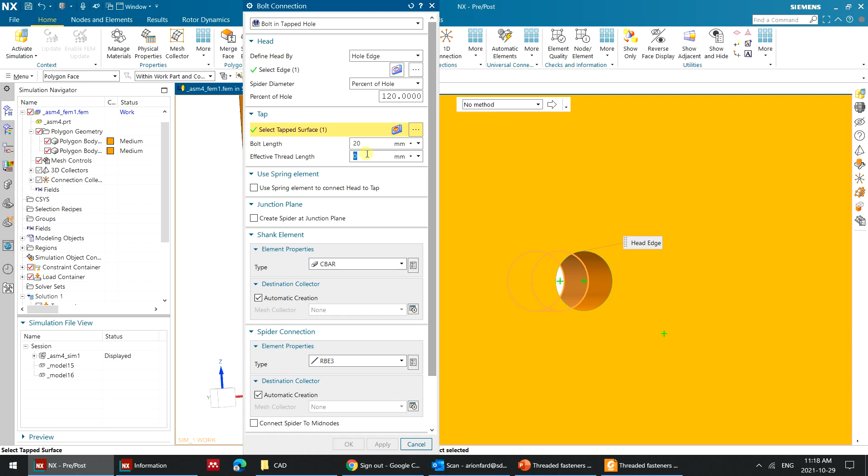Same thing: you select the head, and then instead of an edge, you select the tapped surface, which is that one. It will ask you what the bolt length is. I say 20. Effective thread length is 10, because one plate is threaded and it's 10 millimeters, the other plate is not threaded and it's also 10.

So that's the total length. I selected both of those first, and it threads everything, it threads all the way. It's not a good way to connect two plates like that, one should be without threads, one should be loose while the other one should be threaded.

I can actually change the stuff here, but I don't, I just want to show you how it looks. Now I don't know if it's good enough to see, but I can just remove the plates one by one to see what's going on.

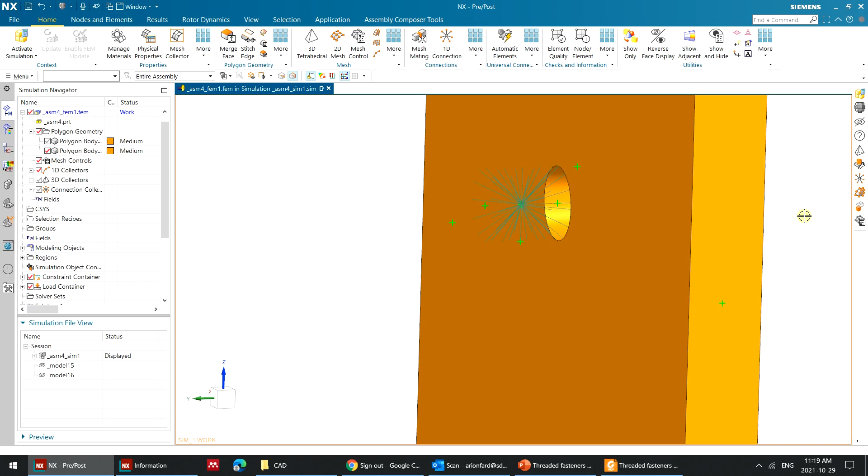Now on the other side, you see we have a 3D spider that just grabs to everywhere. This means the screw actually connects to everywhere on the threaded side, which is the way it actually works, right? When it threads, it connects everywhere. But on the not threaded side, it looks like this, so this is a screw represented only by one needle, and it gives the exact result as if you mesh everything.

Wouldn't the effective area of the bolt be smaller in the place with the threads? Yeah, that's why there's a fore section when you define the section. You can add, I don't remember, a rear section or something like that, so it tapers in between, or you can define different cross sections at different places. But the best and safest way is to go all the way with one section, which is the core or minimum diameter, that's the safest option.

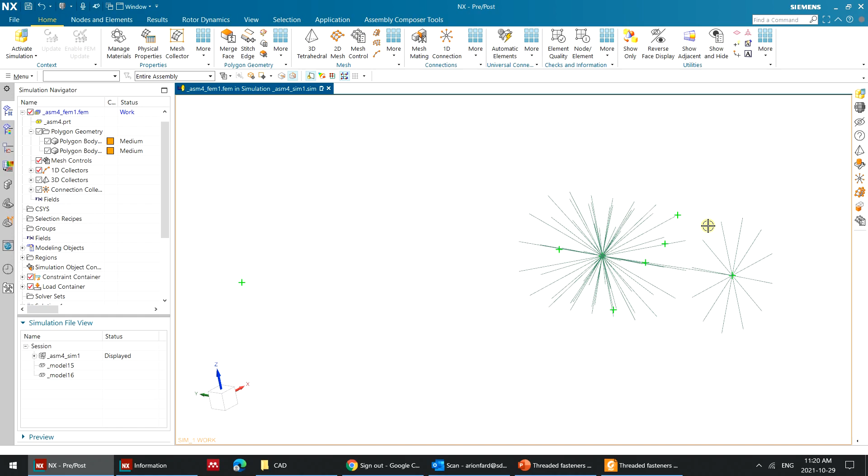We're going to do it like that instead of representing it differently, because if the shank is bigger and the thread is smaller, it's going to fail around the thread, right? You just represent everything by minor diameter and you're going to see the failure. So that's it for today, and next time we're going to add preload here.